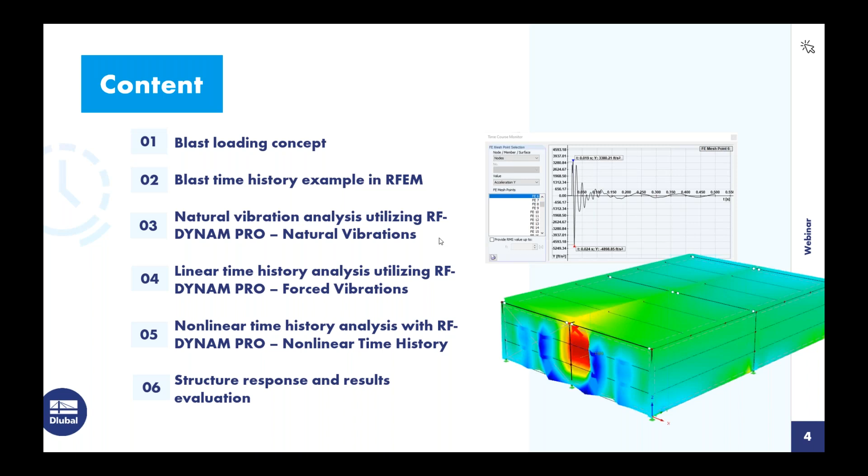We're also going to be utilizing a few different add-on modules within the program. The first is RF-DYNAM Pro Natural Vibrations, which will allow us to run a natural vibration analysis for our structure to determine the angular frequencies, the natural frequencies, and natural periods. Then we'll move on to a linear time history analysis utilizing RF-DYNAM Pro Forced Vibrations. Finally, we'll take into account any material or geometric nonlinearities with the additional add-on module extension, RF-DYNAM Pro Nonlinear Time History. Through all of this, we'll definitely be looking at the structure response as well as the results evaluation for each one of these results.

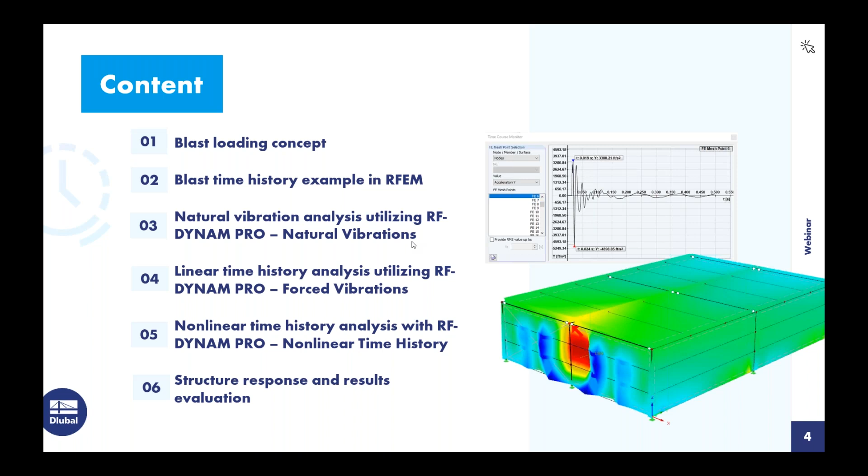Okay, so getting into the blast loading basics. As I mentioned, we're primarily going to be referring to the AISC Design Guide 26, Design of Blast Resistant Structures. We'll also be making some reference to the United Facilities Criteria 3-340-02, Structures to Resist the Effects of Accidental Explosions. Now, there are many more references out there for blast time history, but for today's example, I wanted to specifically refer to Design Guide 26 because this simplifies the time history analysis quite a bit and was just the best guide for today's example within the program.

Now, what are the factors influencing structural damage when we talk about these types of explosions? Well, we know that the structure material is definitely going to play a role, as well as the overall mass and stiffness. What else is important to know is the explosion type, as well as the distance to the structure. Clearly, a larger explosion that is closer proximity to our target structure is going to cause a lot more structural damage than what we'd see from a smaller explosion located further away. And finally, the blast orientation to the structure. Is this located at ground level? Is it up in the air? What proximity to the structure? And of course, if we are located in an urban environment, do we have surrounding structures that we need to consider as well?

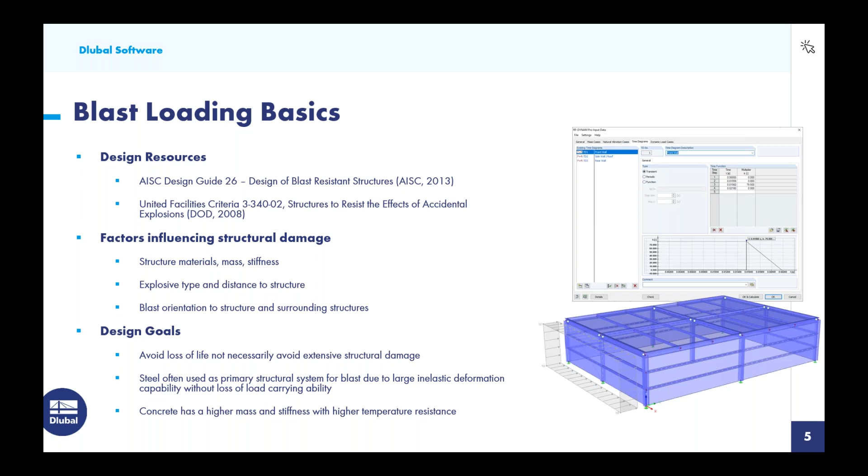Now, as far as the blast load application in terms of a time history, on the right-hand side we have what's called an idealized pressure time history for blast loads. There are certainly several theoretical approaches for exactly plotting this particular curve.

Let's first begin with the peak overpressure - the pressure above the ambient atmospheric pressure, hence the name overpressure. This will be an instantaneous pressure that arrives at the structure. In this diagram we have a short period where nothing happens until the time of arrival, then that instantaneous rise for the peak overpressure applied to the structure.

The positive phase duration is the time period that it takes for the pressure to return back to ambient, or back to zero, shown in the positive portion of the diagram. We also have what's called the positive impulse, which is the total pressure time energy applied during the positive duration - this is the area under the curve.

And finally, we have the negative phase duration. This includes the energy, again the impulse, which is the area underneath the curve that follows the positive phase, where the pressure falls below the atmospheric pressure.

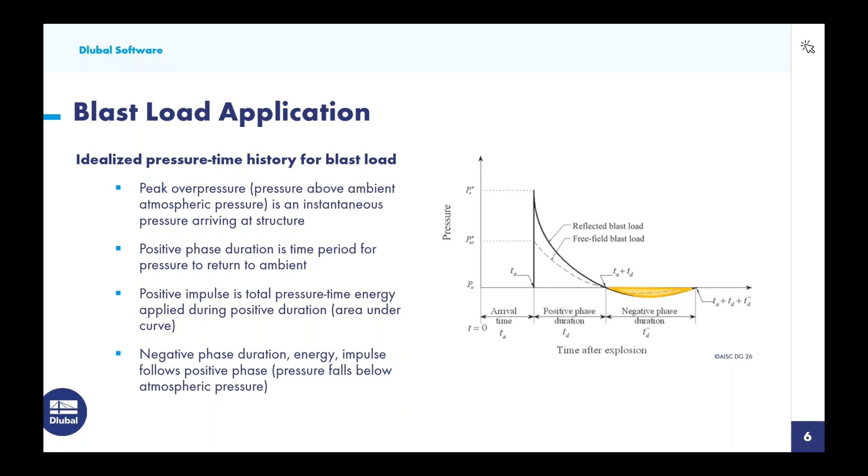Turning to the two different lines you're noticing on this diagram, we have the reflected blast load shown in a solid line, and the free field blast load shown with a dotted line. So what exactly are the differences here?

We'll start with the free field blast load indicated by this dotted line. You notice the magnitude is much lower here. This is what we call the free field or side-on blast load, where the blast wave travels parallel to a surface, more or less just sweeping over this surface with no impeding objects. We might see this with sidewalls, roof elements, or our rear wall, which is what we'll be noticing with today's example. In most literature, we'll see the subscript SO used for side-on.

Now, we also have the reflected blast load, and this is where the blast wave will strike at an angled surface other than parallel. A perfect example would be any surface that is normal to the explosion, so some type of front-facing facade. Obviously, we're going to have much higher pressures here than what we'd see with a wave sweeping over those other surfaces that are parallel to it.

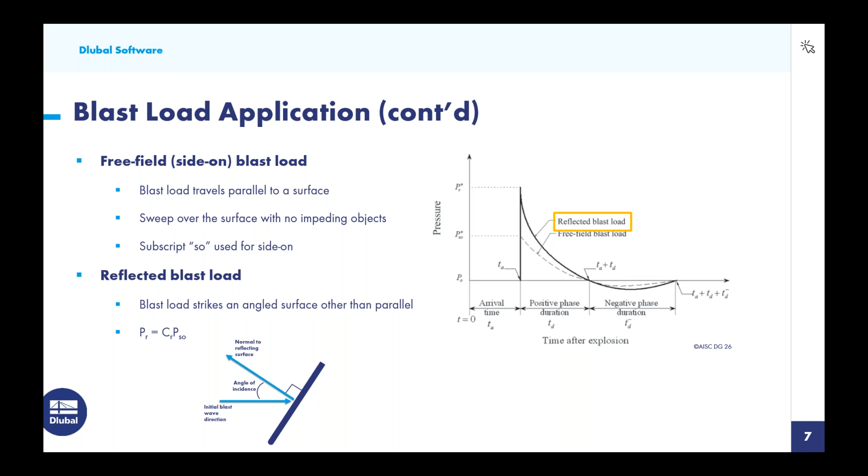So we calculate this reflected pressure with what's called the reflected pressure coefficient multiplied by the side-on pressure, given by this equation. Referring now to the UFC document, there is a nice figure here, 2-193, and you'll notice that the angle of incidence is given on our x-axis.

Then we would locate our peak incident overpressure. We can follow this along to determine what our reflected pressure coefficient should be.

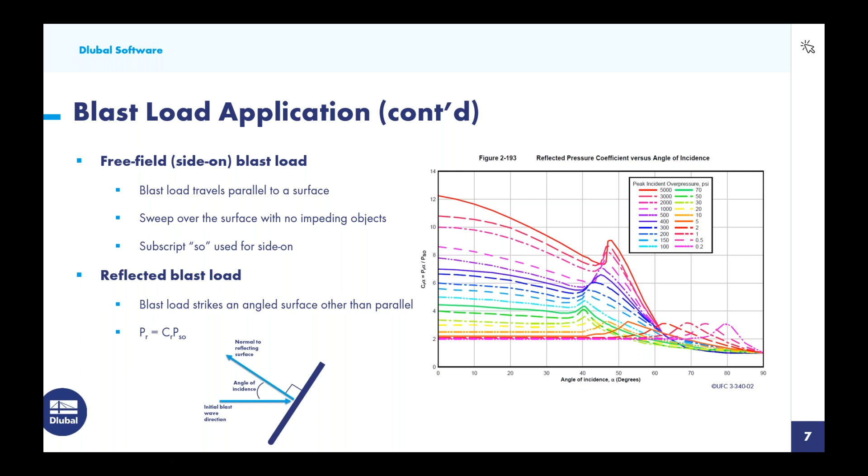So what exactly is the angle of incidence? If we look at this small diagram on the lower left, we have our initial blast wave direction. It is going to reflect off of this surface normal, so a 90-degree angle here, which will produce an angle of incidence. This is the value we want to locate within this figure to determine what that coefficient will be in order to increase those reflected pressure loads.

So moving on to the blast load simplification - we're primarily referring here to AISC Design Guide 26. Let's first start with the pressure time history positive phase.

What we're going to do here is simplify it to a triangular distribution, but we still want to maintain that instantaneous rise as well as a linear decay. So quite a simple application when we compare it to the more theoretical approach shown in the background.

Now, it's important that the peak pressure as well as the impulse are preserved - remember, the impulse is the area underneath the curve. So we have to come up with some other fictitious duration in order to maintain both P and I. This is estimated to be approximately 2 times I over P.

When we're talking about the negative phase, we're actually going to neglect this for the demonstration today, just for simplicity. As engineers, we don't necessarily always want to neglect this - it could be important when we have elements on our structure that are weaker in the reverse loading direction, or we should also consider it for short natural periods compared to the load duration.

Now, some other considerations that we will not be taking into account today include the drag forces due to wind or dynamic pressures - do we have a large wind load following up along with this blast wave as well? Both Design Guide 26 and the UFC document, and many others, give consideration to these drag forces. Do we have large openings to account for the interior loads due to leakage?

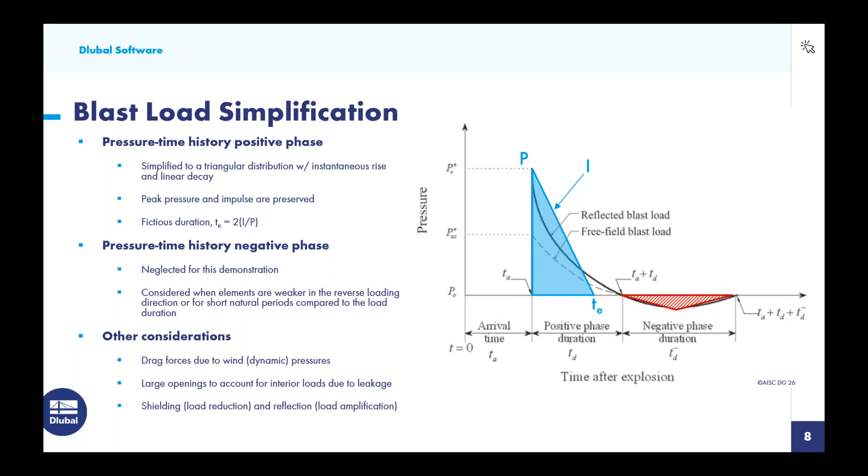On the positive side, we have what we can consider shielding, which is load reduction. When we have a blast wave and we have many other objects in front of our target structure, then of course the load will be reduced. But on the downside, we have what's called reflection, where the load can actually be amplified because it's reflecting off of all of these different objects directly onto our target structure.

So let's take a turn now from these basics and take a look at RFEM, which is our finite element analysis software. This is the main program where we'll fully model the structure. We can load it with general static loads and run a full analysis.

But when we're talking about dynamics or any type of time history, we do need to utilize our dynamic add-on modules. And we actually have a total of 4 of them.

The first is RF-DYNAM Pro natural vibration. This is a prerequisite - we have to go ahead and run the natural vibration analysis before we consider any of the rest of these dynamic analyses listed here. This is going to run the eigenvalue analysis, determine the mode shapes. We can take a look at angular frequencies, natural periods, and we'll definitely be doing that today.

The second add-on module, RF-DYNAM Pro equivalent loads. We actually will not be getting into this add-on module today. It is much more focused on seismic, and in particular a response spectrum analysis according to ASCE 7, the NBC, and various international codes as well. I've done previous webinars on this topic, so refer to our website and YouTube channel if you want to learn more, but we won't be getting into that today.

RF-DYNAM Pro Forced Vibrations does allow us to run a limited response spectra analysis. We can also take into consideration accelerograms, but what we'll be utilizing it for today is to run a linear time history analysis for these blast loads.

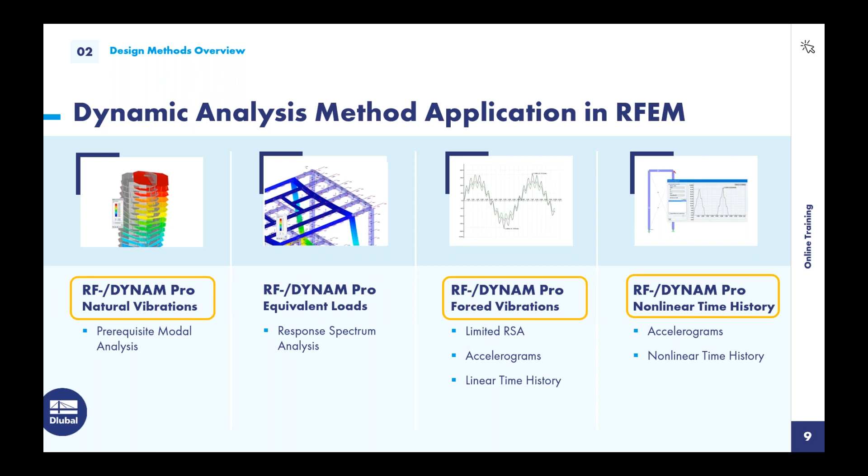So now moving on to our example. Again, I'll be referring to AISC Design Guide 26, and in particular example 2.1. The example within RFEM will follow very closely with this today.

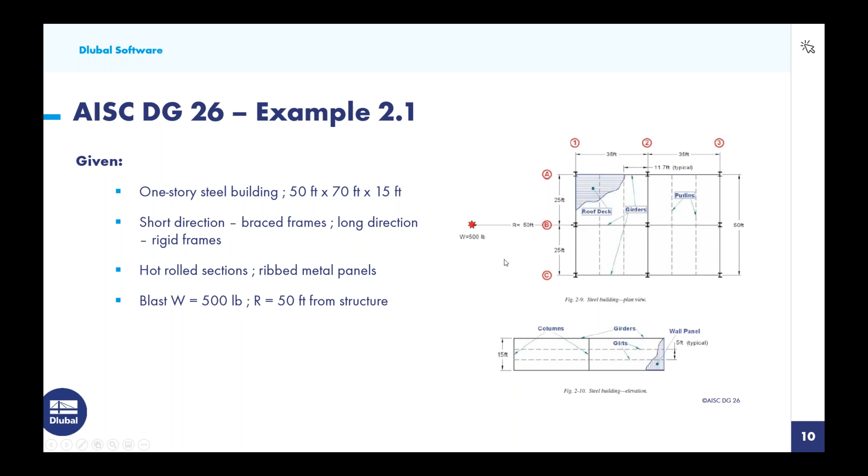So in order to consider the time diagrams for our time history analysis, we actually need to now move through the solution to determine what all of these different variables are. So we begin with the scale distance, and this is indicated by the variable z. Z is given to us by r over the cubed root of w, which is simply 50 feet away from the structure with a charge weight of 500 pounds. Then we're going to get 6.3.

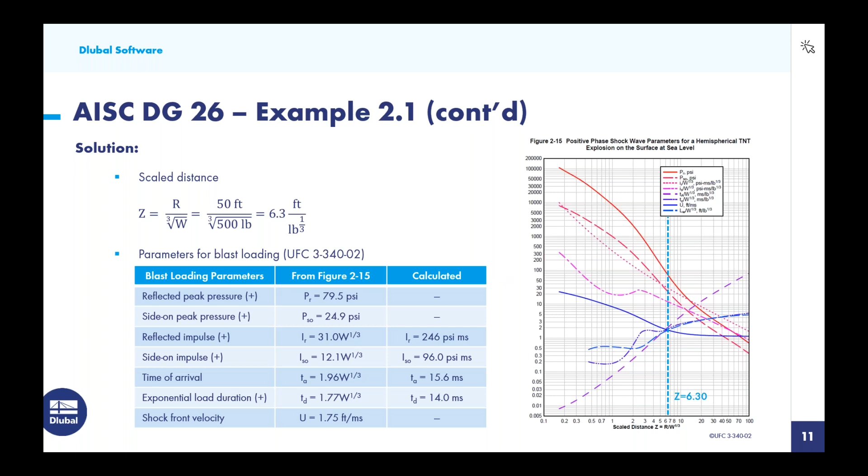Moving on to the sidewalls and the roof, what we'll be applying here is the side-on pressure - remember, that smaller triangle within our idealized curve. For simplicity as well as the conservative approach, we're actually going to use the same scale distance Z that we use for the front wall centerline, also for the sidewalls and roof. Realistically, we could calculate a larger Z to decrease our magnitudes, but again, for simplicity and the conservative approach, we'll just use those same values. Therefore, we need to calculate T sub E. We have P sub O and I sub O from the previous slide, so 2I over P equals 7.71 milliseconds. This is all that's needed for our time diagram for the sidewalls and the roof.

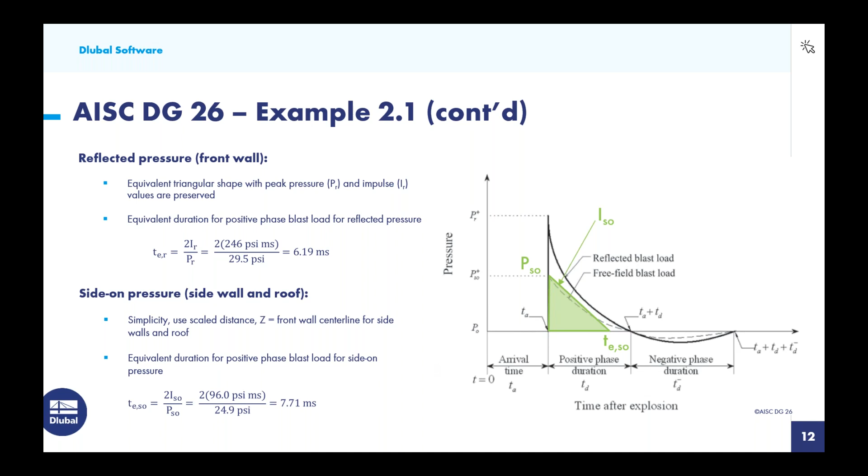Now, the final step here is the rear wall, which is a little bit different than what we just saw with the previous two structure portions. The advantage here is that our charge distance is increased. We have our blast taking place at about 50 feet away from the structure face. We can also consider the full length of the structure here, 70 feet, so our new charge distance is now 120 feet. We calculate that with the scale distance using that new R value, and we get 15.1. So at the front of the structure, we have Z equal to 6.3. At the rear, we have Z equal to 15.1.

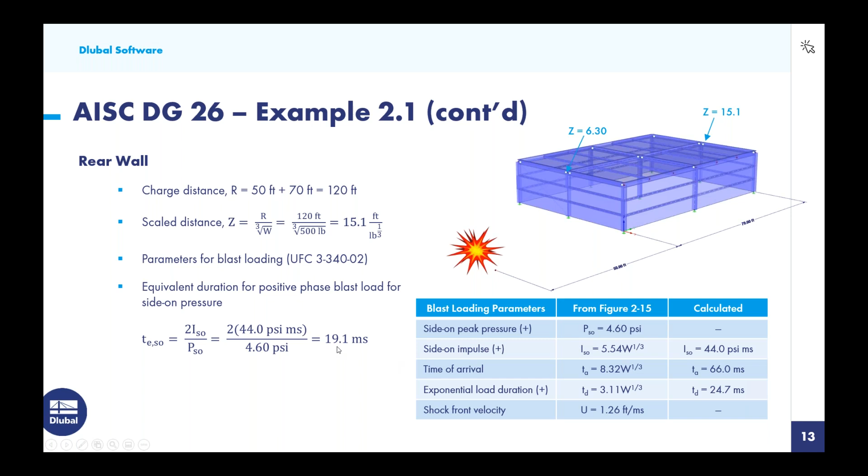So once again, we refer back to the UFC document to figure 2-15. We take a look at Z equal to 15.1, and here is a summary of all our parameters. You'll notice I only listed the side-on peak pressure and the side-on impulse rather than reflected. This blast load is going to sweep over the rear wall - we don't have any type of reflected load occurring here, so that higher magnitude is not of interest to us. Now we do need to calculate that equivalent duration for the positive phase blast load, and again we run this calculation with 2I over P using this data with our new Z value, and we get 19.1 milliseconds.

Now it's also slightly different here in that for our rear wall, it's going to take the blast wave a little bit of time to ramp up to that full peak pressure. It's not instantaneous like what we're seeing with the front, side, and roof. So how do we calculate this? Well, we know the estimated time of arrival is 66 milliseconds.

We calculated that from figure 2-15. What we now need to calculate is this time to the peak pressure, T2.

That's really easy to calculate because how we'll do this is to take into consideration T sub A, which is the time of arrival, and we're going to add on L1 over U, where L1 is the span of the element parallel to the traveling wave. In our case today, it's how long it's going to take for this charge to reach the top of the wall, and that's 15 feet in height. U is going to be the shock front velocity given to us back a couple slides ago from the UFC figure 2-15. So we have this length, we divide it by velocity, we get a time, and ultimately we get 77.9 for T sub 2.

Now the time to the end of the blast is just going to be T sub 2. We're going to add on that estimated time that we calculated on the last slide of 19.1 milliseconds, and we get 97 milliseconds.

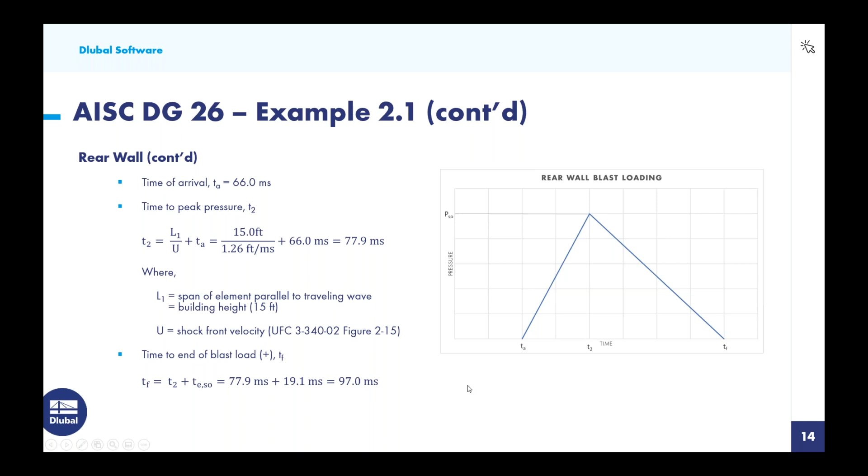A few assumptions that I just wanted to reiterate: of course, we're using this equivalent triangular loading function over the more exact loading function. There are plenty of more theoretical equations, such as the Friedlander approach, if you wanted to calculate that curve exactly. We are going to neglect the negative phase of the shock, as well as some of these other variables I mentioned, dynamic pressure, openings, and so on.

Finally, for simplicity, the full side-on pressures are computed for the non-reflected surfaces. So this includes the sidewalls, the roof, and the rear wall. This is the full value here. Rather, in the UFC document, there are load averaging techniques to decrease this magnitude. So a lot of the approaches that we took today are definitely the more simplistic but also the more conservative approach. UFC will have much more information if you want to get into more detailed analysis.

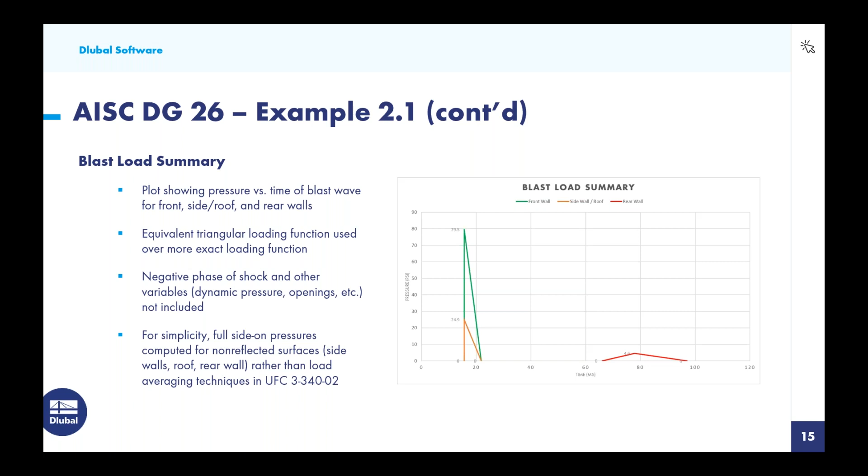All right, so now we are ready to get into RFEM. You'll see the structure already modeled here. This is exactly from the PowerPoint as well as Design Guide 26 that I mentioned. It is just a basic one-story steel structure, 50 feet in width, 70 feet in length, and 15 feet in height. We're going to assume that the explosion happens over here on the left-hand side, normal to this front face that we're seeing here.

To quickly just cover a few of the cross sections that I've used in this example: for my columns, you'll see I have W14 by 193. When we look up at the roof, we'll see W18 by 130, used for those main beams and main girders. We also have our purlins, which are channel sections, channel 10 by 25. And then we also have our girts, which are again channels, C10 by 30 sections.

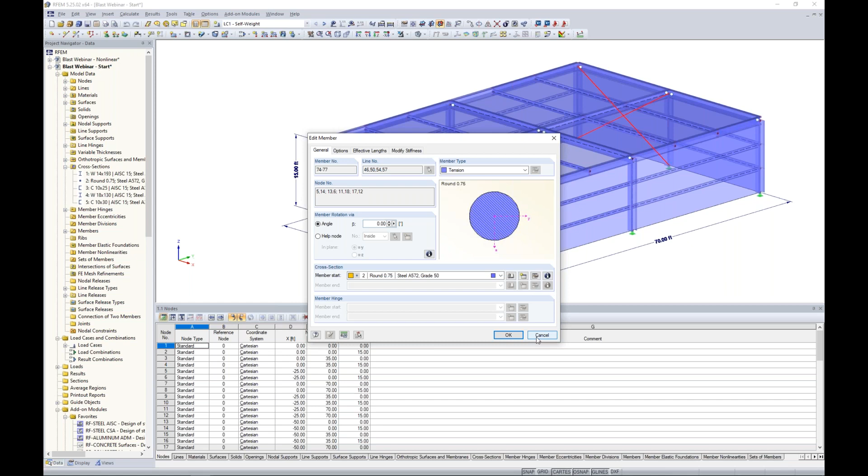It's also important to know, if I highlight these elements here, we have a couple of X braces. Remember, in the problem statement, we have brace frames in the short direction and moment frames in the long direction. I added this lateral bracing here, and if I double click on it, you'll see that these are tension only members. So in the program, these will take only tension forces, some type of cable element we'll assume. When the program experiences compression within these elements, it will completely take it out of the analysis, but RFEM being a nonlinear analysis, it can reactivate these if we see tension again in a subsequent iteration. So let's just keep that in mind for those X braces.

Now, looking at the surfaces, for both the roof and the walls, what I went ahead and modeled here are orthotropic stiffness surfaces.

And it's just a general steel A653 grade 40 material.

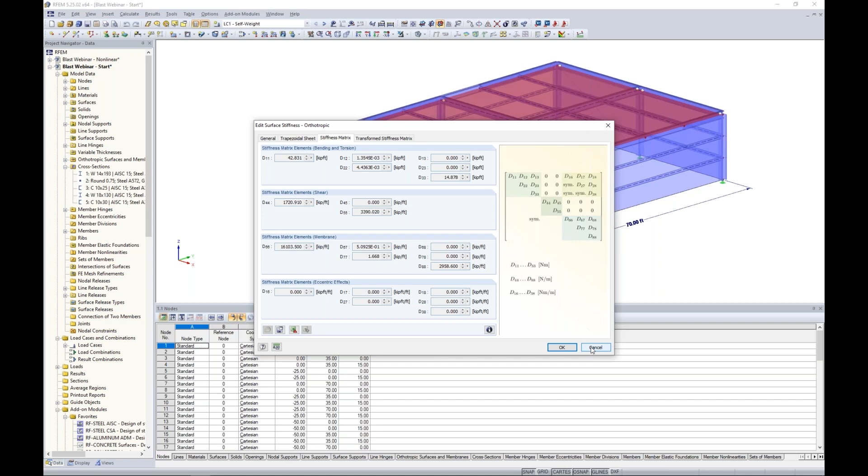When we go into the detail settings of this orthotropic stiffness, we'll see that I have set this to a trapezoidal sheet. What's convenient with this option is under the second tab, I can simply put in the sheet thickness and some of the geometric variables for my ribs, including spacing and so on. The program will automatically calculate my stiffness matrix for me. This is definitely going to add a lot of lateral stability to our structure at that roof level, and I went ahead and used it for the wall elements as well.

All right, so that is a basic overview of our surface elements as well as our members. Under my display, what I'll do is turn off my dimensions here. And let us discuss the loading.

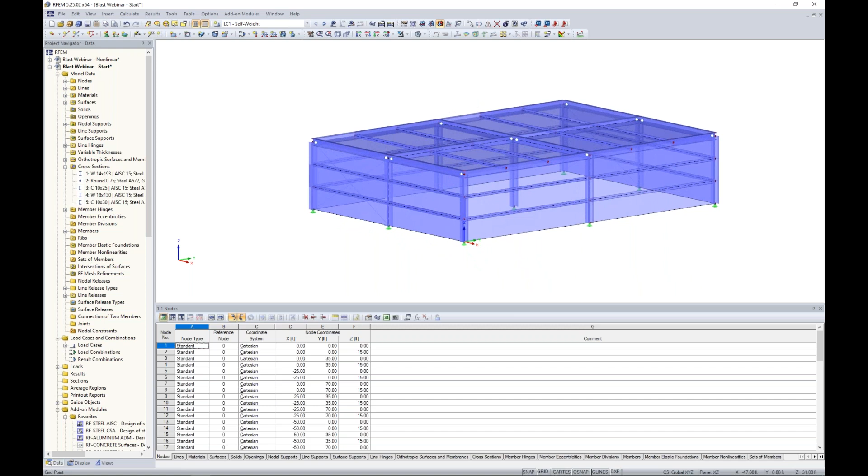So I've created 4 separate load cases here. The first is going to be self-weight, and it will account for the self-weight internally of all our members and surfaces automatically, but I've also added in a general member load up at the roof level to those main beams and girders, 0.1 kips per foot, to account for any additional dead load we may have up there.

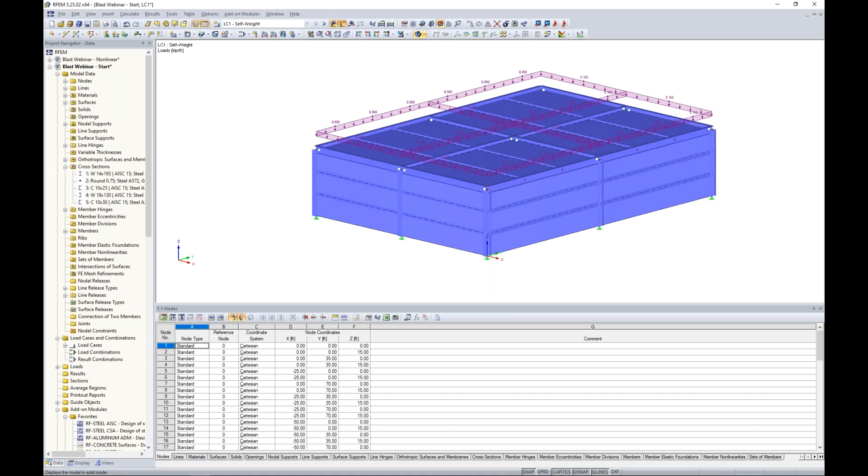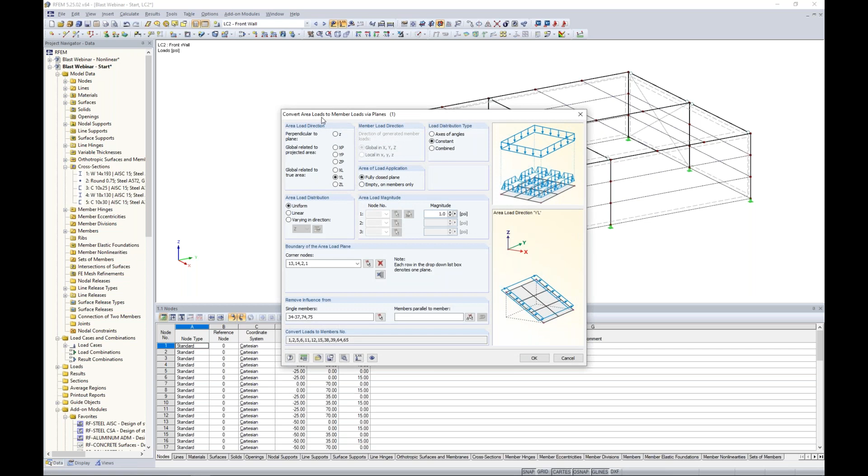Now, the next load is going to be for my front wall, and we can see this load applied as an area load. This is to initially account for that blast load acting on this front surface. This area load is a bit special because it's going to convert the area load to member load. I'm not applying it to this surface, but rather I want it applied directly to these main lateral resisting frames, and you can see the magnitude is set at 1 psi.

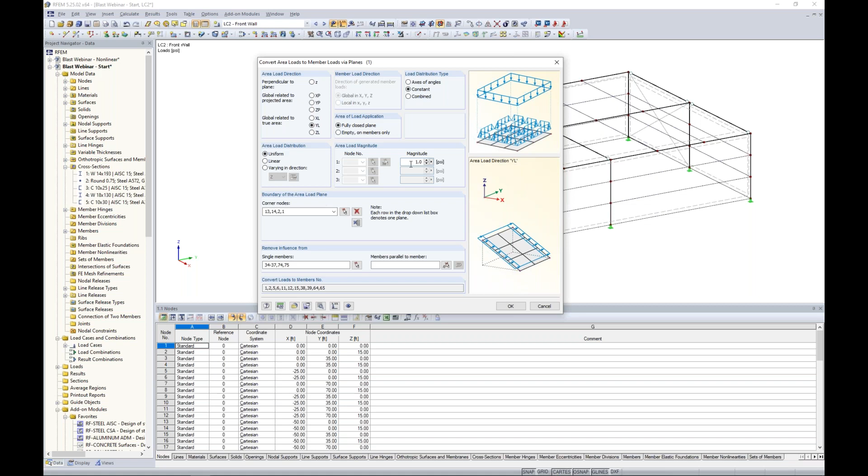We want to use a very arbitrary value of 1.0 here. Later on in the time diagram, I'm going to tell the program how this magnitude will increase or decrease and vary over time with the actual time history analysis, but for now we want to set this to 1.0. So with this front area load, if I right click and display separately, we can see those as member loads based on their tributary width applied directly to those frame elements.

In a similar fashion, if we take a look at load case 3, we have area loads on the sidewalls as well as area loads on the roof, and once again all of the magnitudes are 1 psi. If I right click and display separately, you'll notice I applied them to those main frame elements. I did not apply them to any of the channel sections for the girts or purlins, and again I did not apply directly to the surface. I'm more interested in the structural response of these main elements included in our frames.

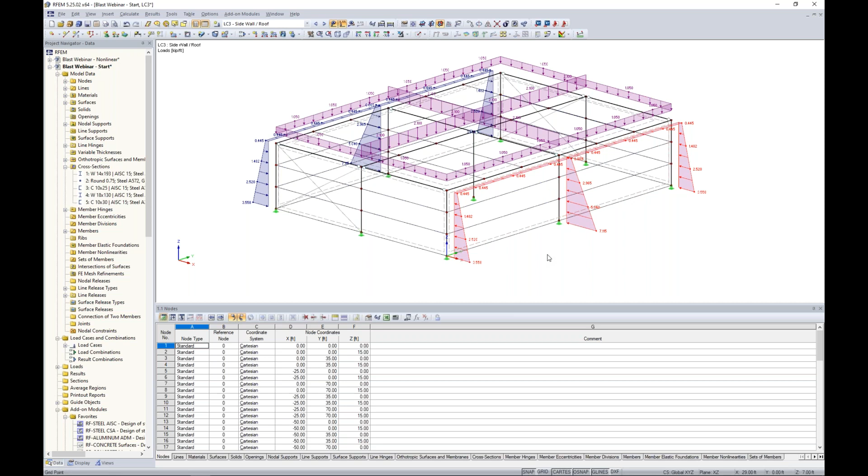And finally, we'll take a look at our last load case here, and we have an area load applied to the rear of the structure, normal to that rear facing wall, 1 psi. I can right click to display separately, and we see those member area loads applied directly to those elements as well. So a very basic application here.

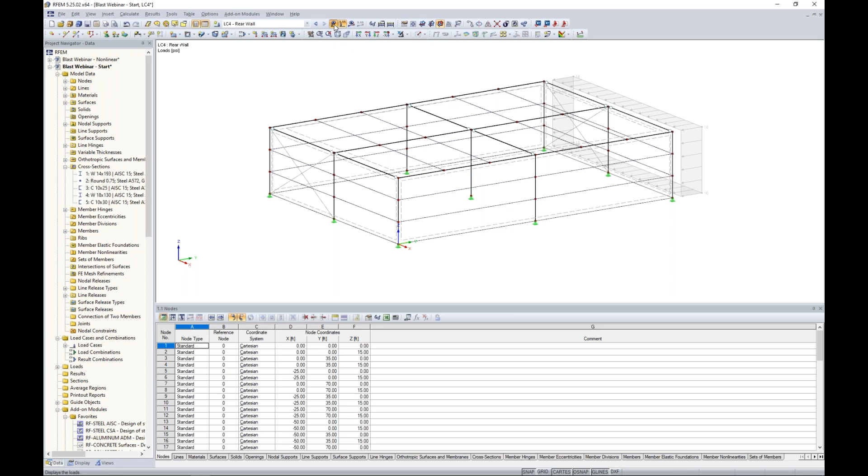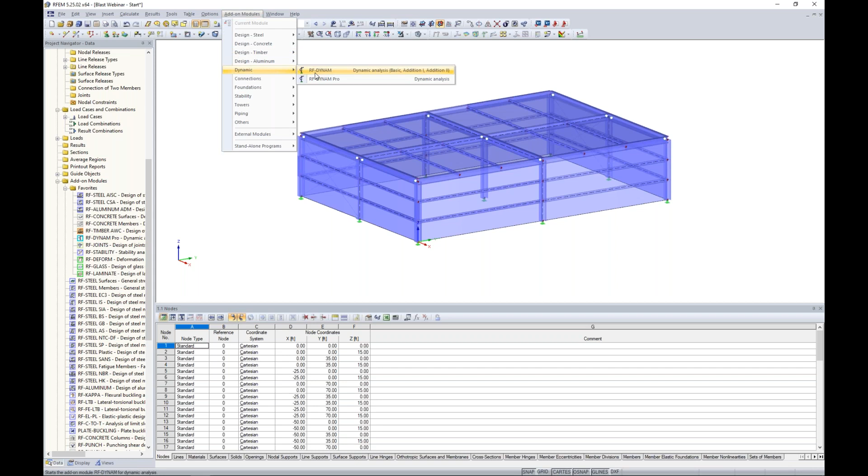Now, we're not going to spend any more time within RFEM, but rather we want to move into the dynamic analysis. So what I'm going to do is launch RF-DYNAM Pro, and we can see in our project navigator here is our long list of add-on modules. You can find RF-DYNAM Pro here, or we can go up to the add-on modules and find it categorized a bit better under dynamic, and we launch RF-DYNAM Pro.

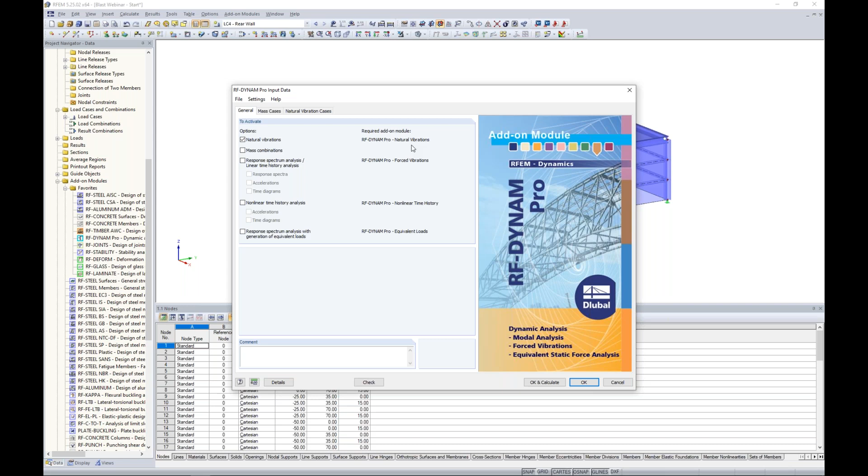This add-on module is going to be nothing more than a simple dialog box that pops up, and here are those 4 different dynamic modules that we discussed in the PowerPoint. You'll notice by default the first one activated is RF-DYNAM Pro natural vibration. So again, this is a prerequisite. We have to run this natural vibration analysis before we move on to any of the additional add-on modules.

I also can activate here my mass combinations tab, and we'll get an additional option. This is if we wanted to combine multiple mass cases into a combination. I won't be doing that for today's example, but that is an option. So really we just need to move from left to right here with our tabs. The first mass case, I'm actually going to import, if you remember, that first load case, which includes self-weight as well as that member load applied to the roof structure for those various elements.

Now I'm going to uncheck here from self-weight of structure. If I leave this checked, we're accounting for self-weight twice, which would be incorrect.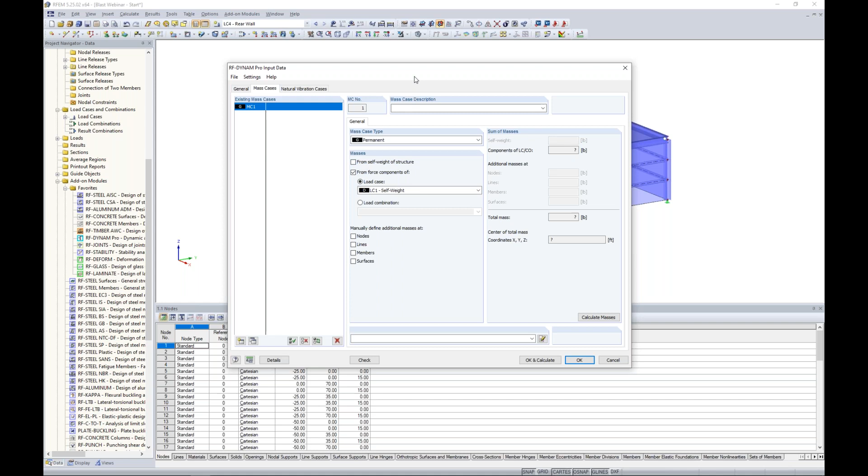We also have the ability to define additional masses at nodes, lines, members, and surfaces. We can deactivate masses, so a lot of possibilities here. But for now, we'll just stick with this single mass case and move on to our natural vibration cases.

We want to initially tell the program how many eigenvalues to calculate. For my structure today, I'll set this to 30. The scaling of the mode shapes, we'll leave this as the square root sum of the squares, and we can move on to the calculation parameters.

Under this dropdown, we want to select either our mass case or our mass combination of our acting masses that we want to consider for the natural vibration analysis. In our case today, we only have one mass case, so that's what's available.

As far as the directions or about which axes this mass is acting, this is somewhat dependent on the type of mass matrix. With the diagonal matrix translational degrees of freedom, some of the options above are grayed out, but as we scroll through, translational and torsional degrees of freedom, rotational, we have different options available. So we'll be moving forward with the diagonal matrix translational degrees of freedom for today, as well as the general Lanczos solver.

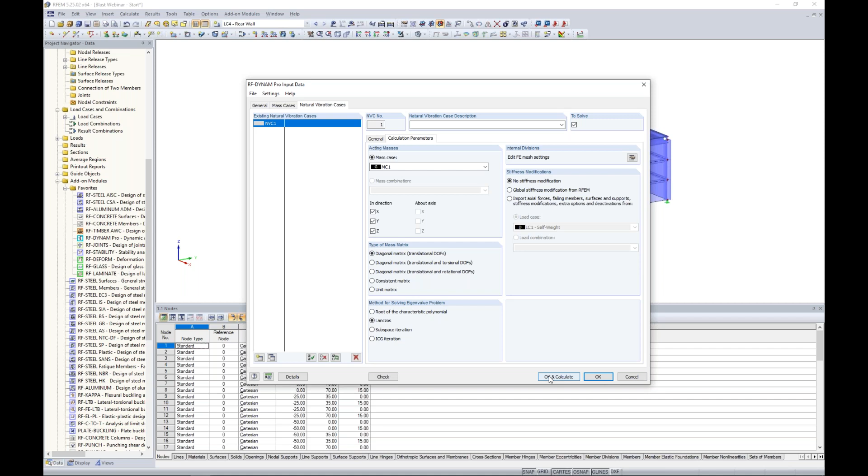Our help file, which you can locate down here at the lower left-hand corner, will give much more theoretical background on some of these different options and how it can improve the calculation for your particular structure. So once we are done setting all of our natural vibration case data, we can go ahead and run the calculation, and you'll see for today's example, this solves rather quickly.

So we are presented with our results of the dynamic analysis back in RFEM. Now we're technically still within this add-on module, we can see this from the drop-down box here. We also want to view this information in table 5 for dynamic analysis.

Let me go ahead and redock my tables here. What you'll notice within this table is the natural vibration case is given to us within this dropdown. That's all that we've solved for. But right next to us are all of the 30 mode shapes that we told the program to solve for.

We can scroll through these different mode shapes just to kind of see how the structure is responding under the given frequencies. Now, I always recommend to immediately jump to this effective modal mass factors tab. And what this tells me, if I scroll all the way to the bottom, is the mass participation.

This is shown at 95% in the X direction for a sum of all 30 of our eigenvalues, and 96% for a sum of all of the eigenvalues in the Y direction. So this is great mass participation. We like to see something around 90% or more.

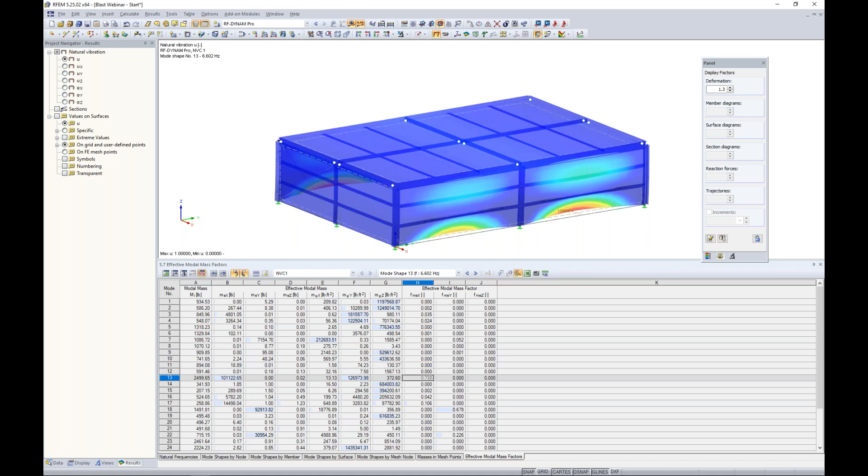What else I want to pay careful attention to is what we call the dominant modes. If I look at a lot of these early modes, there really isn't much mass participation going on until we get down to mode shape 13. And we have 74% participation in the X direction.

Then I go a little bit further and I see my dominant mode in the Y direction. So this is 68% in the Y direction.

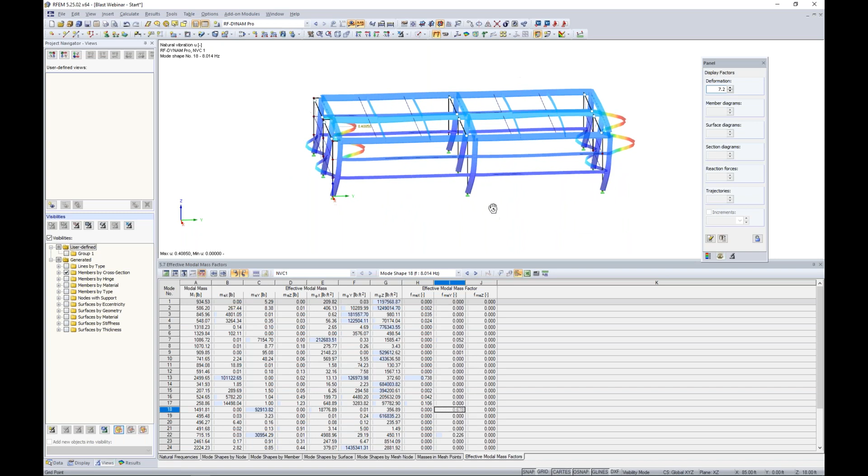What might also be helpful too is under our views tab, we can deactivate our surfaces here. Maybe we increase our deformation, so we can see we're really getting a response of the structure as a whole. Now, of course, there are some maybe what we call more local modes with these girts, but overall, this is certainly our dominant mode in the Y direction.

So keeping in mind mode shape 13 and 18, we jump back to this first table here, natural frequencies. I'm going to highlight, let's take a look at mode shape 13 as well as mode shape 18. So for these two dominant modes, I can now determine what my angular frequency is, my natural frequency, and my natural period.

Now, we might be thinking, well, what does this really matter for a time history analysis? But this actually does come into play a little bit later on when we're talking about damping considerations. So we'll just leave this highlighted in the background for now. It's great to understand which are our dominant modes for the structure for the natural vibration analysis. So let us go back into RF-DYNAM Pro then.

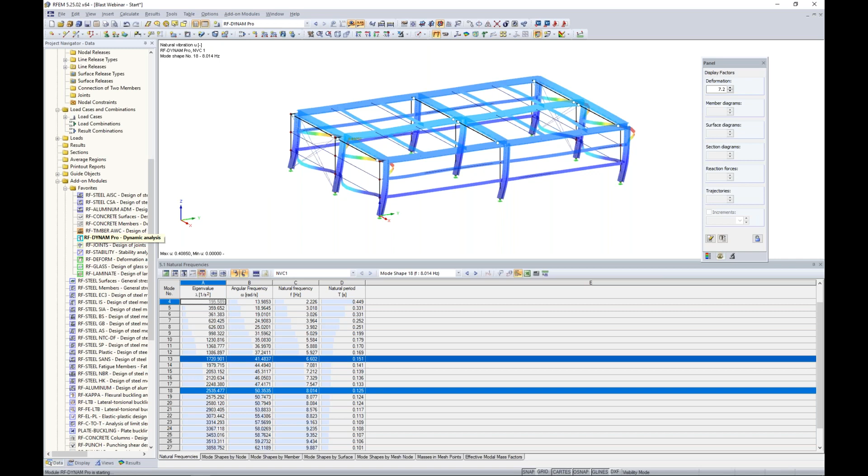And what we can do now is activate RF-DYNAM Pro for forced vibrations, time diagrams. We get two additional tabs at the top. Everything we've just input for the natural vibration case remains the same, so no changes to be made there.

But now we want to move on to our time diagrams tab. This is where we input the information we solved for within the PowerPoint, to tell the program how the loads applied back in RFEM as load cases will vary in magnitude over time due to this blast load. The first time diagram we want to specify is for our front wall.

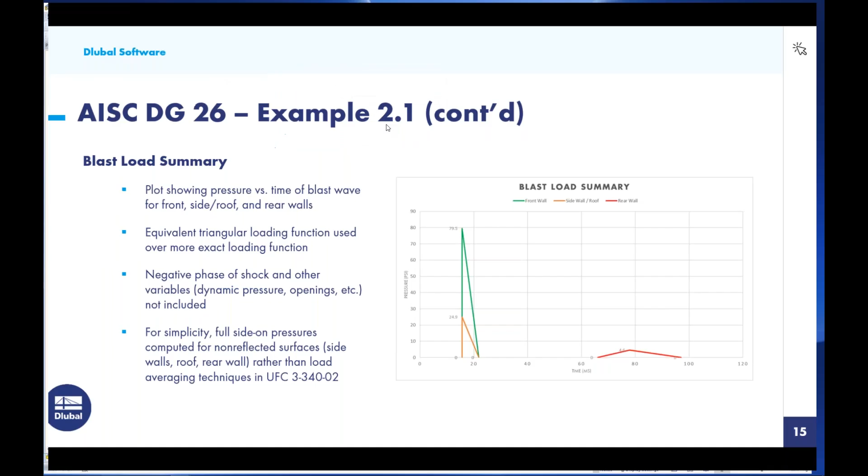I'm going to jump back to the PowerPoint for a quick refresher on what the time diagram should look like for this front wall. Using the simplified approach, we have a short time period until the time of arrival, an instantaneous pressure rise up to 79.5 psi, and then a linear decay back to 0. All of our points are given here in terms of pressure and time, and this is the information we want to input into the program.

For the first time step, we will specify the transient option. Transient just means we can input each individual time step here, and that's what we'll be utilizing today.

In turn, we can utilize a periodic option, which would be interesting for rotating machinery, for example, where we put in an angular frequency as well as a phase shift.

Finally, there is the ability to input a function, so we can define variables and parameters. This would be extremely useful if we were taking the more theoretical approach for the idealized pressure time history curve, for example the Friedlander equation. We have additional resources I can relay to you if you're interested in that more theoretical approach with this function option, so just reach out to us if interested.

But for today, taking this transient approach with the more simplified application, we want to input these time steps. The first time step will be 0, 0. The second time step will be 0.01559 and 0. Then we have 0.0156 with a pressure of 79.5 psi, and then 0.02180 and 0. This looks identical to what we just saw in the PowerPoint. Now, the program doesn't allow you to put two values for this particular 15.6 milliseconds, so I had to offset this by a very small value, but more or less this is that instantaneous rise in pressure for our front wall, and we are complete here.

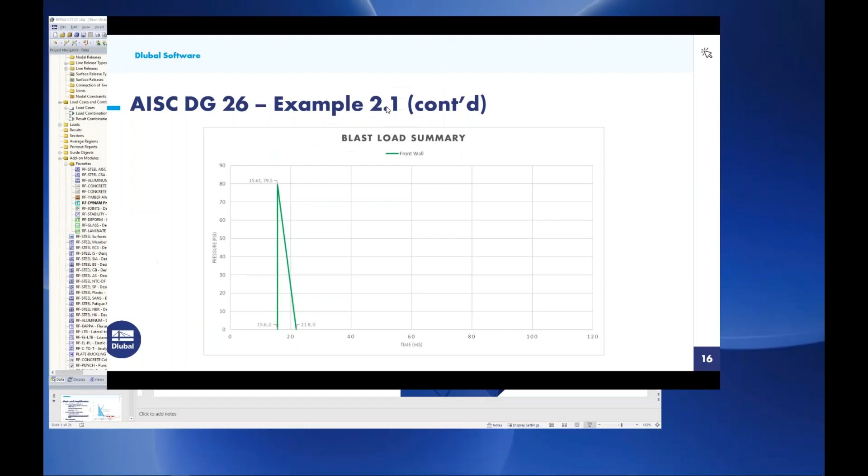Going back to the PowerPoint, let's get a quick refresher on what this should look like. Remember, the time diagram looks identical to what we saw for the front wall, with the difference that our pressure is going to be much less here, only 24.9 compared to 79.5 for the front wall, because this blast wave is just sweeping over these surfaces rather than reflecting.

So once we have these input points, we go back to RFEM. The time is going to stay the same in this first column. All we need to do is change the magnitude, or multiplier, to 24.9. And here is our second time diagram.

Now, the third time diagram will be for our rear wall. Once again, let's refer back to a nice summary. We don't necessarily have that instantaneous rise in pressure, but rather a linear rise in pressure over a certain time period, and then a linear decay back to zero for this rear wall. This is also occurring quite a bit later in time, relatively speaking, than what we're seeing with the front wall as well as the side walls and roof.

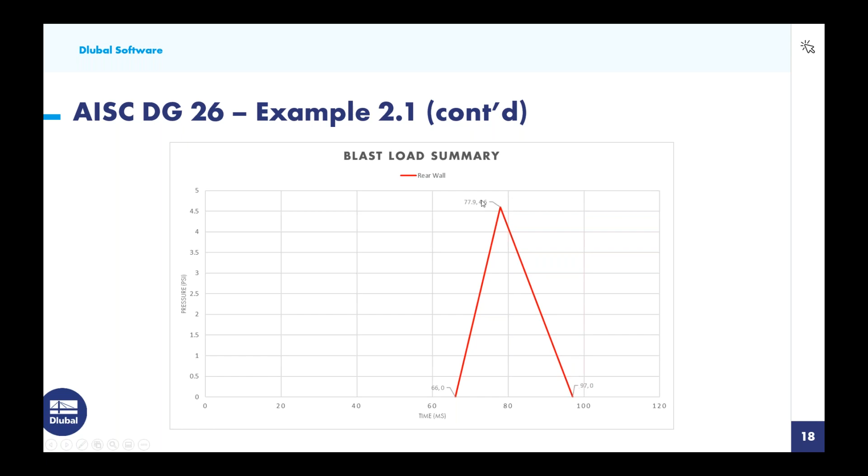So we want to take note of all these various points. Our max pressure is only 4.6 psi, so much, much lower. Going into this last time diagram, we want to input our points: 0, 0. The second point will be 0.0660 and 0. The third point will be 0.0779 and 4.6 psi, and then 0.097 and 0.

And it looks like we lost that one,

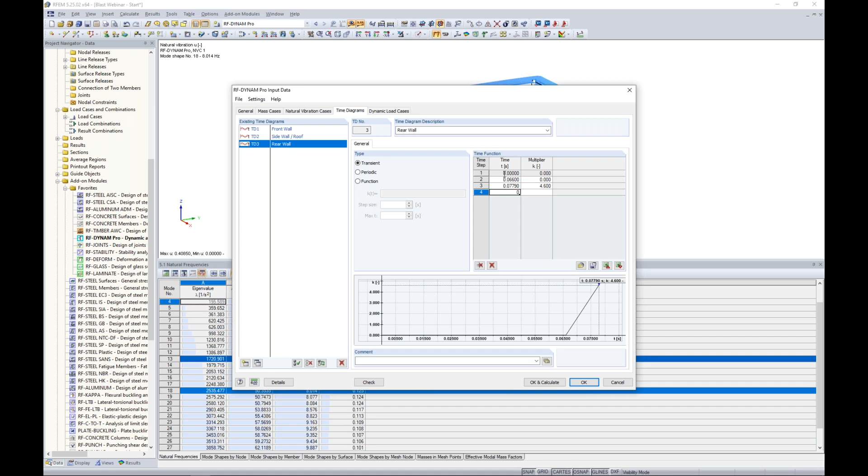0.097 and 0 - okay, so here is our time diagram for our rear wall. Notice that these are just multipliers. So when I say 4.6 psi, all that we're going to end up doing is relating it back to those load cases that we set in RFEM with 1 psi. It was important to use 1 psi because we'll use this multiplier to affect the magnitude over the time duration.

Once we have input all three of these time diagrams, we can move on to the dynamic load case tab. This first dynamic load case I will title linear, and notice only our linear solvers are available to us. The rest, grayed out, are related to other dynamic add-on modules we do not have activated. We will utilize a linear implicit Newmark analysis solver, and notice the natural vibration case is completely grayed out here, because we do not use this information for this particular solver. This is in comparison to the linear modal analysis, which heavily depends on that natural vibration case.

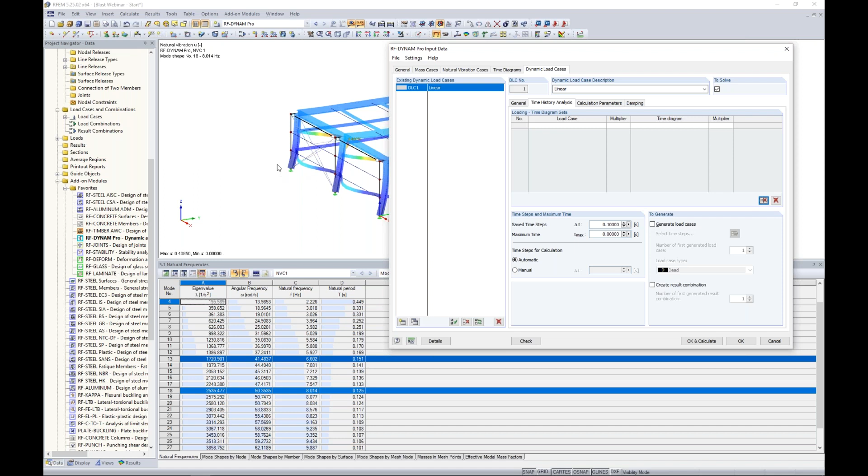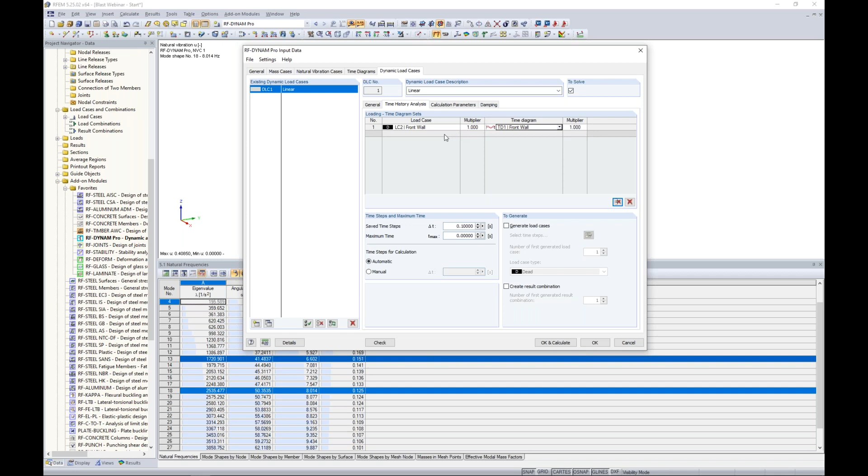With the Newmark analysis, we can move on to the time history analysis. This is where we relate those load cases back in RFEM. Remember the front wall area loads, then the side and roof area loads, and finally the rear area load. We relate each to the relevant time diagram. So the load case front wall is related to my time diagram front wall - this tells the program how to adjust the magnitude over the full duration of the blast analysis. The second set, sidewall roof, is related to our sidewall roof. And finally, our rear wall is related to our rear wall.

As far as the saved time steps, setting this to a higher value has nothing to do with the analysis itself - it's just what will be shown to us back in RFEM when we review the results. By setting this to a larger number, we reduce the file size and shorten the calculation, but if we don't have enough time steps, we won't accurately capture the results - some of those max and mins. We want nice smooth curves for something like our time course monitor, so for example today we'll set this at 0.001.

Now, the maximum time will only be 0.5 seconds. This is a very short duration, and we don't need to set this to something like 10 or 20 seconds, because everything is happening so quickly in milliseconds that 0.5 seconds will accurately capture what's going on with the structure response.

Now, the time steps for calculation - this is important for the analysis internally, and it's really a compromise between calculation time and accuracy. There is an automatic option; you can refer to our help file if you're interested in how the program sets this automatic time step, but for something like a blast analysis with such a short duration, it's a little better to have full control over what time step you're using.

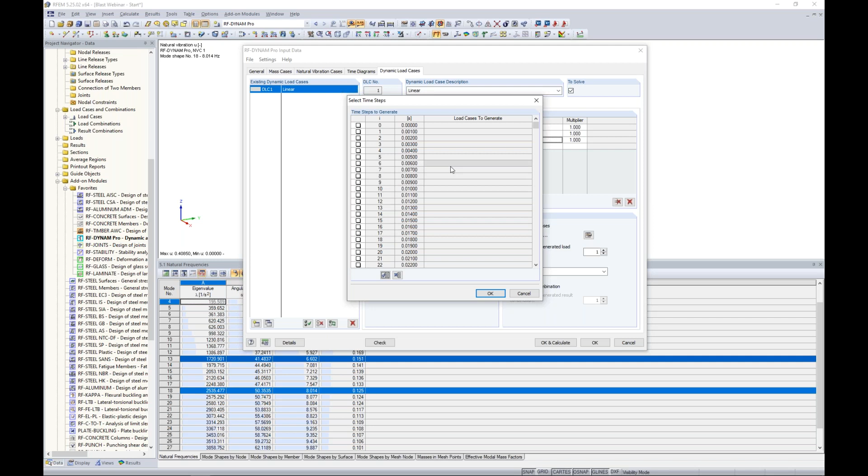We do have the ability to export out load cases here for each one of these time steps, and you can see when I go into the details, I can turn on and off the various time steps I'd like to export as load cases. But keep in mind, it's a little deceiving because we're not exporting out the loads - we are exporting out the results for the selected time steps. We won't be doing that today, but the other option is to export out a result combination.

So this is going to be an envelope solution for all the time steps that we've considered here. We can combine those result combinations with additional static loads if we'd like.

The calculation parameters: remember, the program knows nothing about the natural vibration case based on the Newmark implicit solver, so we need to redefine the acting masses here. We leave this as we've already set before, mass case 1, diagonal matrix for translational degrees of freedom.

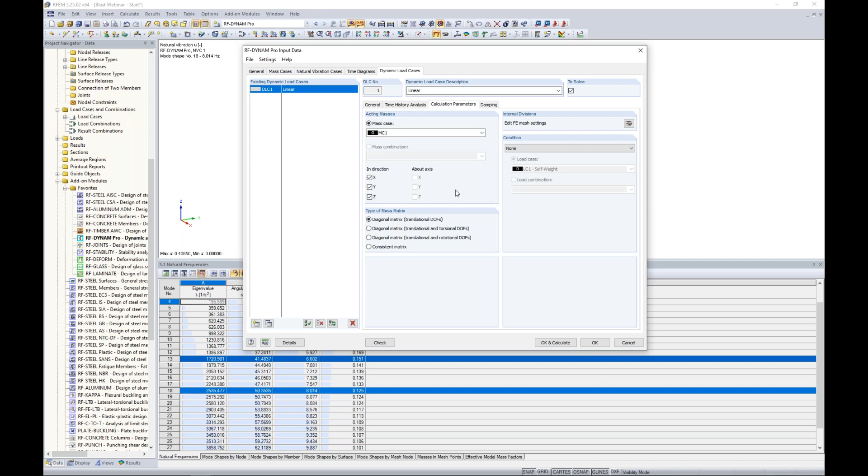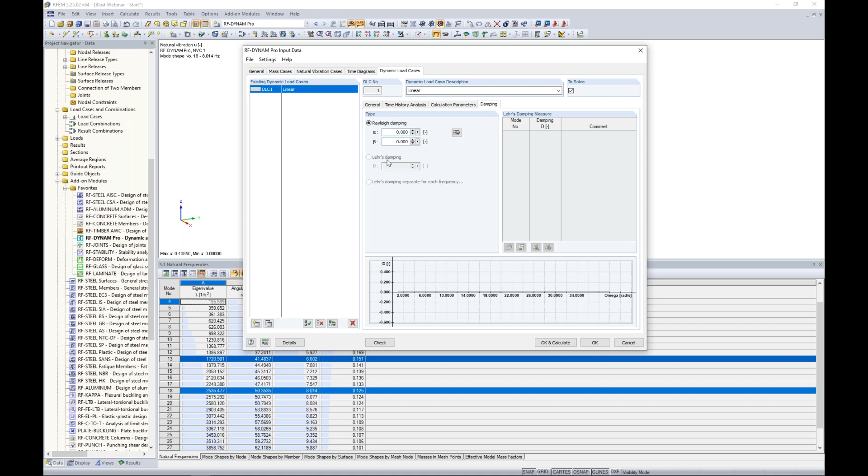Finally, we have our damping consideration. When we're talking about the Newmark solver, we have to think about damping in terms of Rayleigh, and most of us are likely more familiar with Lehr's damping. For a steel structure, Lehr's damping might be around 2%. We just need to do a simple conversion here, and it's actually an equation with two equations, two unknowns.

We can easily calculate both this alpha and beta based on the Lehr's damping that we want. Alpha is going to relate to the mass portion of the damping matrix, while beta is going to relate to the stiffness portion of the damping matrix.

So we can either do that manual calculation ourselves, or we have a nice tool in here. This tool allows me to input a couple of different mode shapes for the angular frequency, as well as my desired Lehr's damping. So this is why I have saved in the background here mode shape 13 and mode shape 18.

Remember, those were my dominant modes for that natural vibration case. So I can input my angular frequency for mode shape 13, which will be 41.48, and the damping consideration will be 0.02 for Lehr's, so 2%.

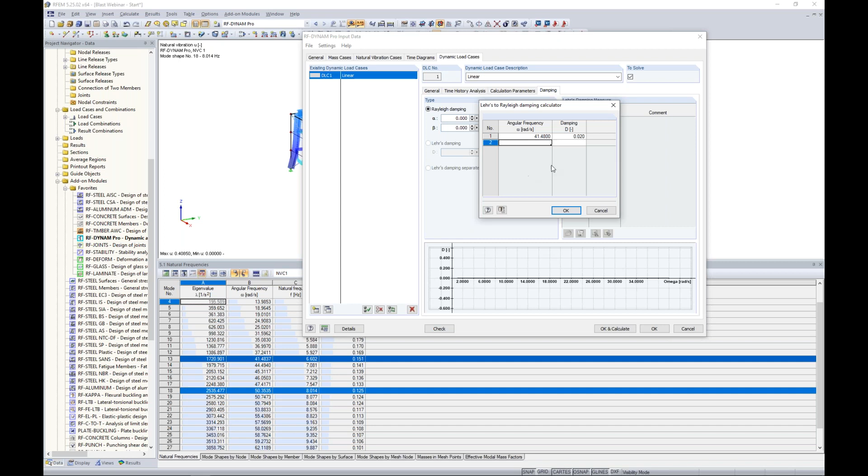Same process for mode shape 18. This time our angular frequency was calculated at 50.35, just given to us here in the background. I want Lehr's damping to be 2%. I click OK, and the program automatically calculates alpha and beta for me.

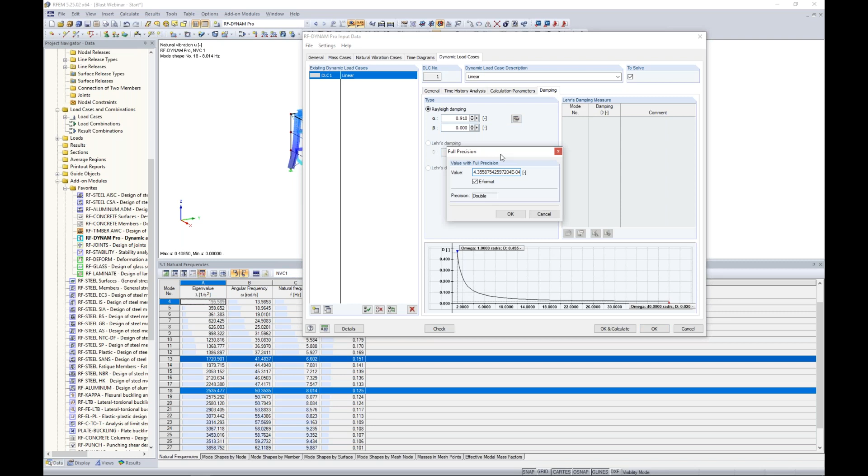Beta may look like its value is 0 here, but we can go into the full precision and see that it's just a very small number, 4.36 times 10 to the negative 4.

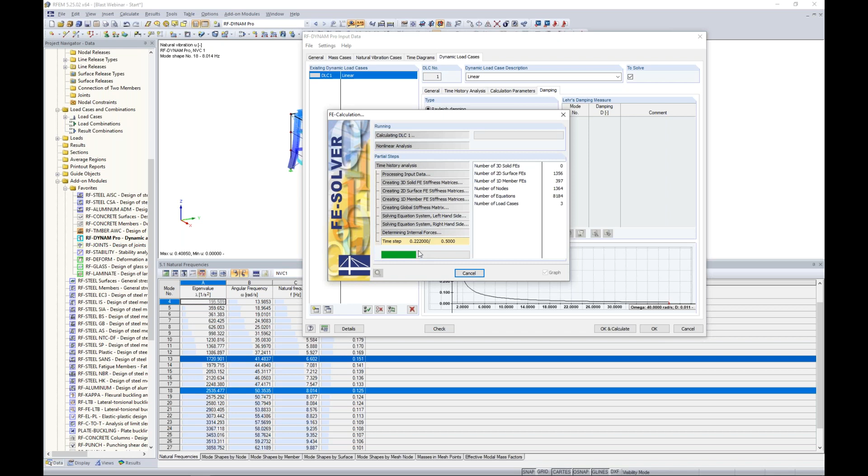Once we have input all of our information for this initial linear time history analysis, we can run our calculation. For a linear calculation, you can see it actually solves pretty quick. We have our progress bar shown here at the bottom, and we set our time step at every 0.001 seconds. Our total duration is only 0.5 seconds.

Once this is done solving, we'll be given back into RFEM here, and I'll go ahead and cancel out this visibility. We're technically still within this add-on module, RF-DYNAM Pro. We go to table 5 here. Under my drop-down, I have my natural vibration case, but now we have our dynamic load case as well.

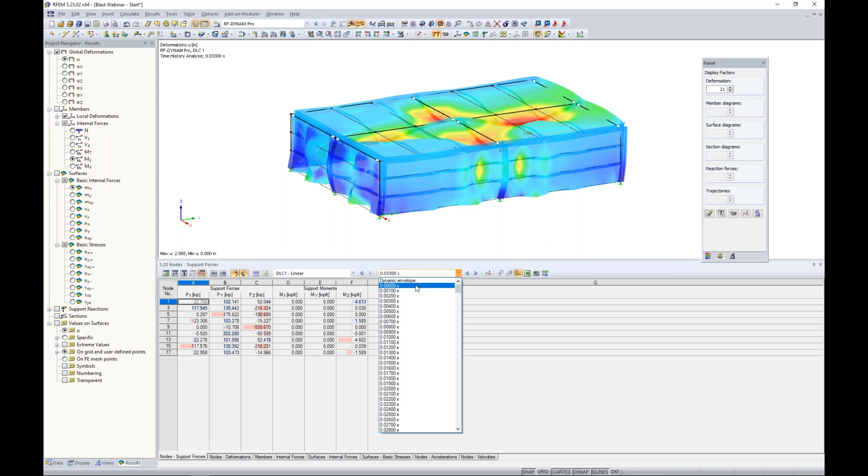Right next to that is going to be all of our saved time steps. So if we're looking currently at the global deformation here, we have time step 0. We can actually scroll through these, and remember, nothing's happening on our structure here until we have that estimated time of arrival at about 0.016 seconds, and that's where we start to see this blast load impact our structure.

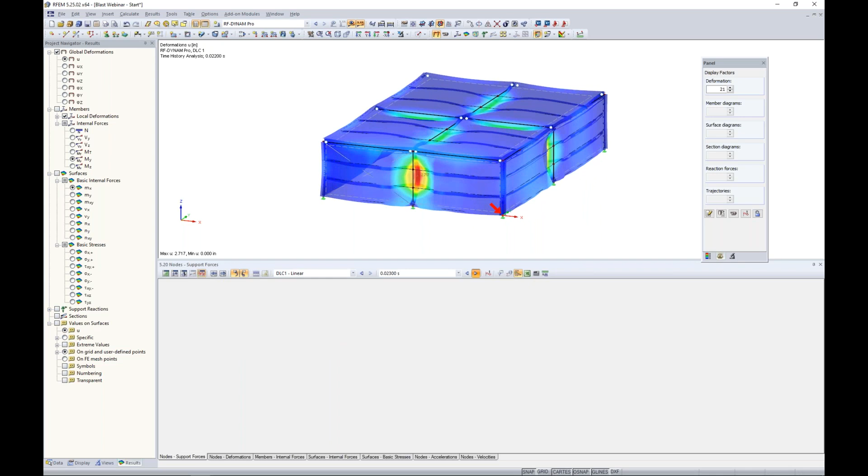And we continue scrolling through these different time steps to slowly see that wave load travel from the front of the structure to the center and the roof, and clear back to the rear of the structure.

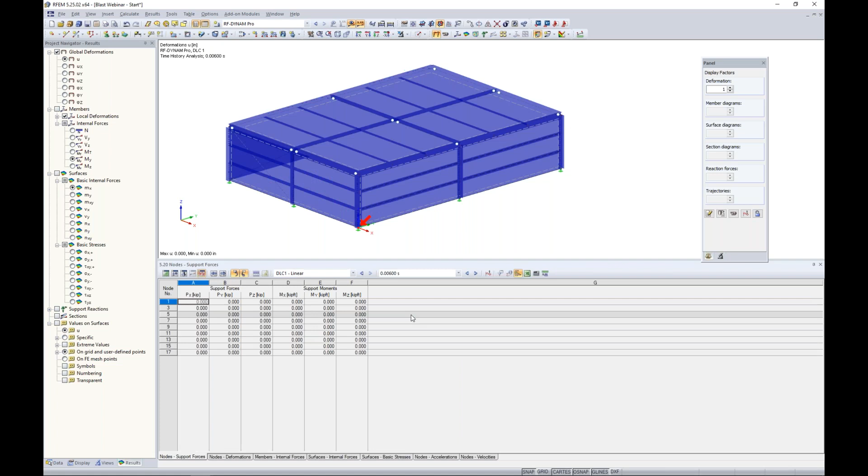Now, for any one of these time steps, you'll also notice that we have a dynamic envelope up here at the top. All of our results are going to be given to us in table format, so we'll see member internal forces, we can view node deformations, stresses on our surfaces. We can export all of this information to Microsoft Excel at the click of a button if we wanted to do some further sorting. We can view all of this information graphically here as well with our project navigator.

What I think is most of interest is a time course monitor, though, when we're talking about a time history analysis. With a time course monitor, we can go ahead and launch that directly from our table tools here, and I can graphically select a single node, for example. With this node, you'll notice the program automatically updates my time course monitor.

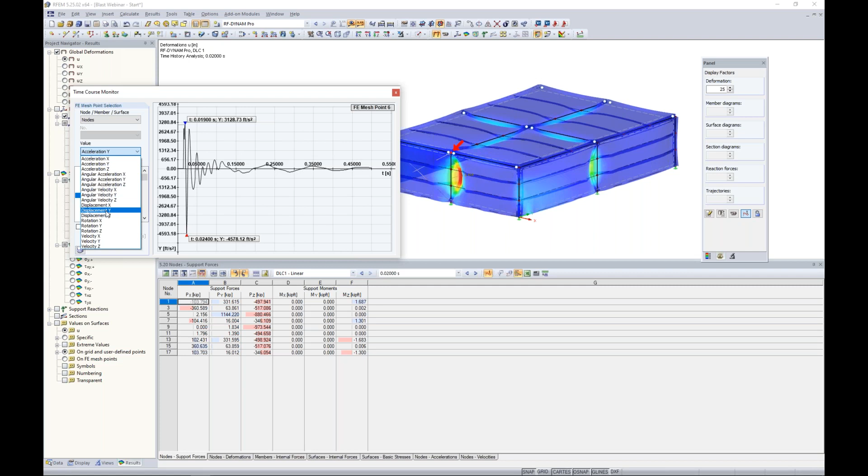Let's take a look at the acceleration in the Y direction. We can see here the acceleration at this particular node shown over the full duration of the 0.5 seconds for our time history analysis. And if we want, we can turn this to, let's say, displacements in the Y direction. So we're seeing these large displacements and they're slowly dissipating over time.

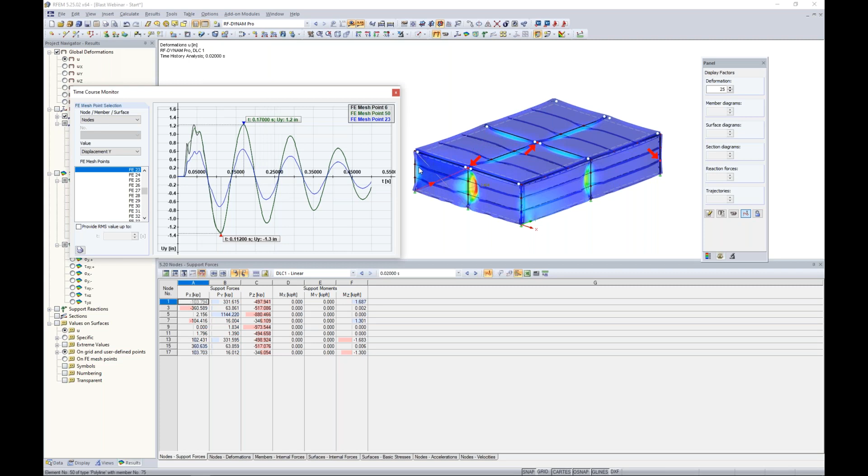We also have the ability to hold down our control key, and we can select multiple nodes if we'd like to generate them on this same time diagram. You'll notice that those will just be overlaid here. We can right click, view these as numeric values, and we can export this information to Microsoft Excel as well.

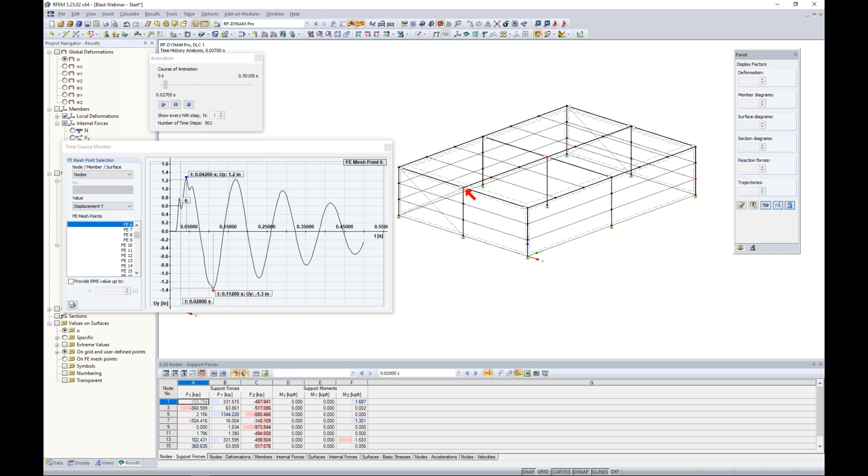It's pretty powerful what we can do within these various time course diagrams. Now, also within this option here is the ability to view animations. So if we take a look at our structure and turn on our animation mode, when we play this and turn on our global deformations, we're going to see the structure response of these deformations over time. We'll be able to see how these surfaces and members are moving. You can see that the time course monitor is slowly moving from time step to time step.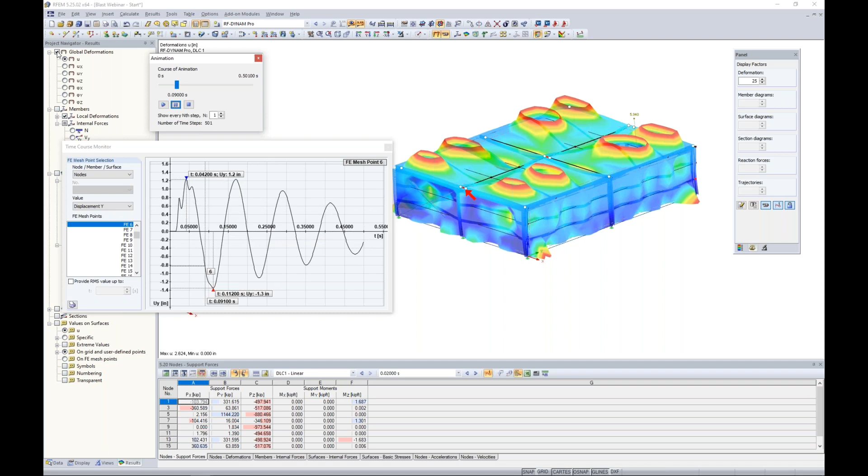Again, this information that is plotted here is important for those saved time steps to make sure that we get nice smooth curves here for our particular analysis.

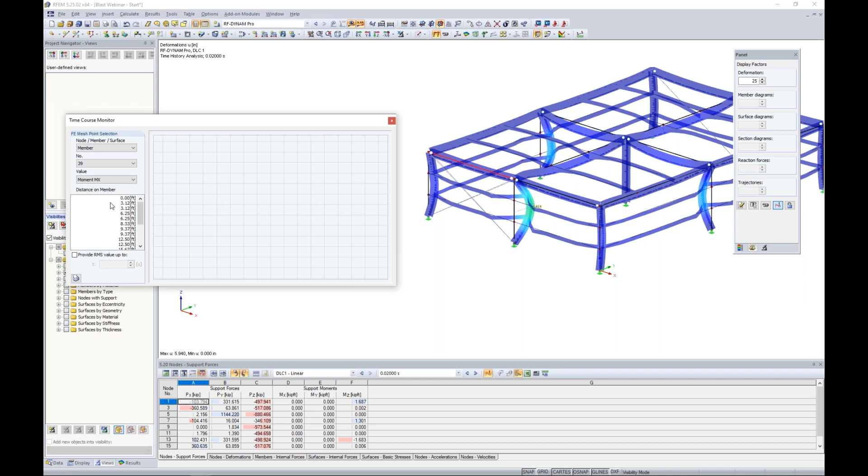The other thing that is of interest to us is some of the internal forces for our members. For this, let me turn off the display of our surfaces just so we can get a clear view of our member elements here. And we'll select this member, one of our front beams. We can take a look at our moment, for example, about the global x-axis. We can see we're definitely seeing higher moments early on with this blast impact analysis, and then it will slowly dissipate over time as well.

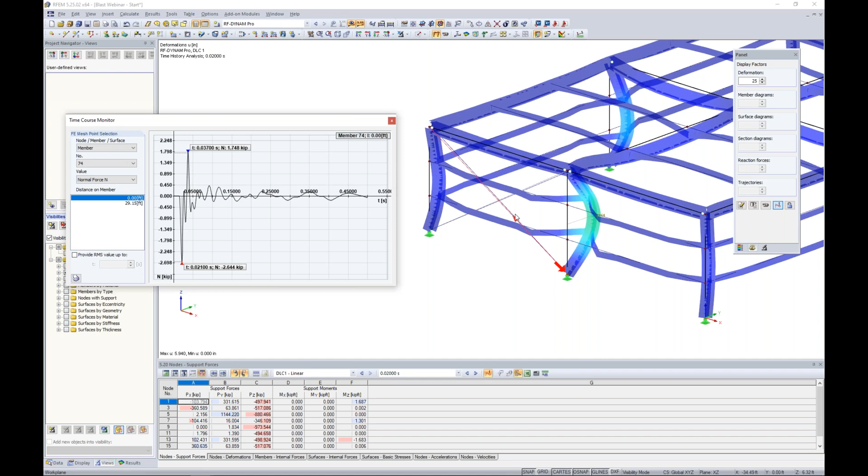If you remember, what else is of interest to us is this tension-only member. With the tension-only member, we technically should see only tension forces. So I'm taking a look at this within this time course monitor for my normal forces for member number 74, and we can see it highlighted here. But here's the problem. We're seeing compression forces of -2.64 kips, which is telling me that this cable element is taking on a compression load of 2,600 pounds. We certainly know that that cannot be the case.

So why is this? Well, this is simply a limitation of the linear solvers. Any nonlinear element, such as tension-only members, is going to be automatically converted into truss elements for the linear analysis. So the program only knows what it knows, and if it sees a truss element internally, it's going to think, okay, well, then it can take on these high compression loads as well.

There's nothing stopping it. Same thing with nonlinear supports. So if we have supports that are failing in uplift, sure, that's easy enough to define in RFEM for the static analysis, but this linear solver will convert it to a linear support when it runs the dynamic analysis. And finally, something like nonlinear materials - plastic materials for steel design will be converted back to linear elastic materials.

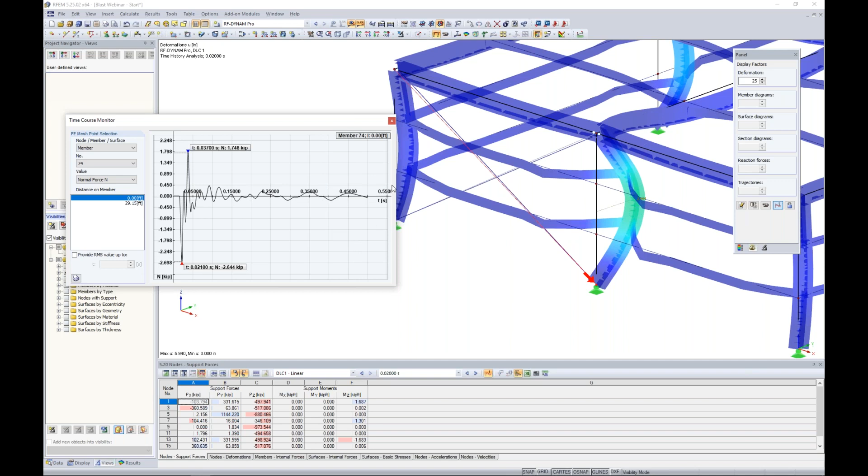So how can we overcome this if we know that these nonlinearities are extremely important for our blast design? This is where we're going to go back into the add-on module. We can go up here to the current module, RF-DYNAM Pro, and we're going to activate here Nonlinear Time History for time diagrams. You'll notice that none of my tabs changed here.

In fact, my time diagrams that I previously defined, we're going to use those again. Under the dynamic load cases, I'm only going to make a copy here of my linear load case, and we'll call this one nonlinear. What the nonlinear time history add-on module extension does is it releases these two nonlinear solvers.

So now we have the nonlinear implicit Newmark analysis as well as the explicit analysis solver. Now for something like a blast load, an impulse load, it is suggested to use this explicit analysis, and that's what we'll be using today.

Under the time history analysis, again, because we made a copy, nothing changes here. The only modification that we want to make is the time steps for calculation. Remember, I said that when you consider a nonlinear analysis, this requires a much, much smaller time step. That's just because we have these extremely rapid changes under such short durations that you have to have a very small time step to accurately account for this. So under the full precision here, we make this so small, in fact, that it will be 1 times 10 to the minus 6 power. So very, very small.

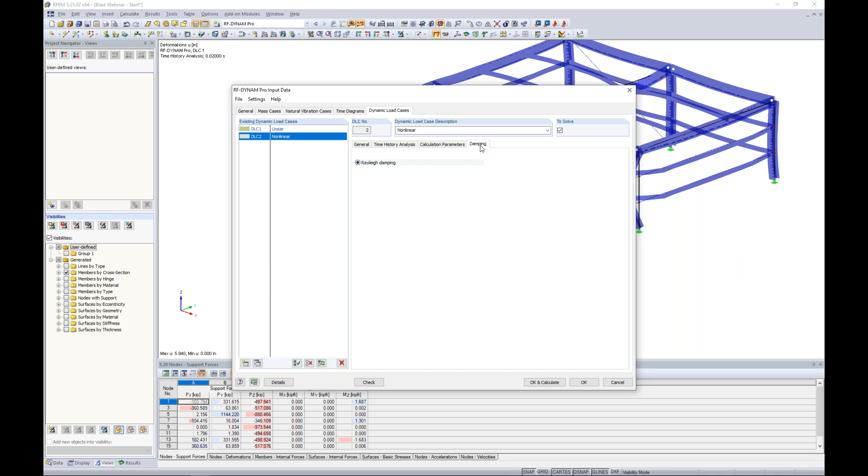Realistically, under calculation parameters, notice only the diagonal matrix is available for this particular explicit solver. And for damping considerations, we can leave this the same, but the program will only use the alpha coefficient for this particular solver. So as you can imagine, this is going to take a little bit longer to solve than what we saw with our linear analysis.

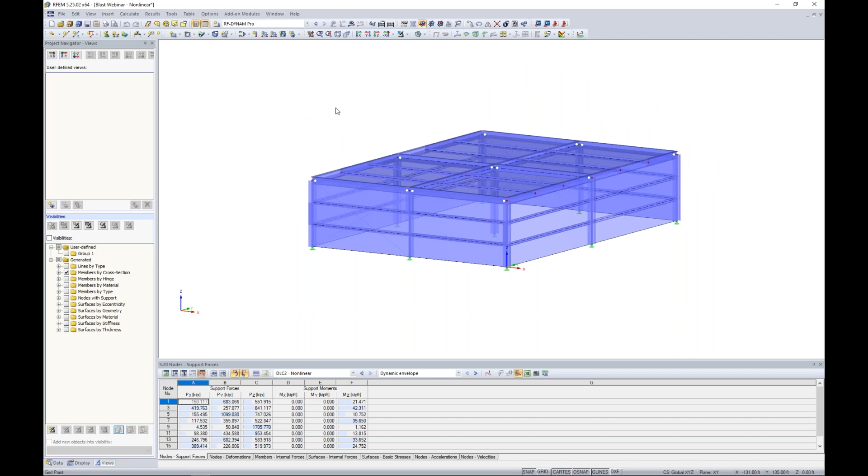So what I went ahead and did is run the results for us and open up a saved model. Once those results are done running, we'll be given back into RFEM. In my table 5, I now have my natural vibration case, my linear dynamic load case, but now I have my nonlinear dynamic load case available to me as well.

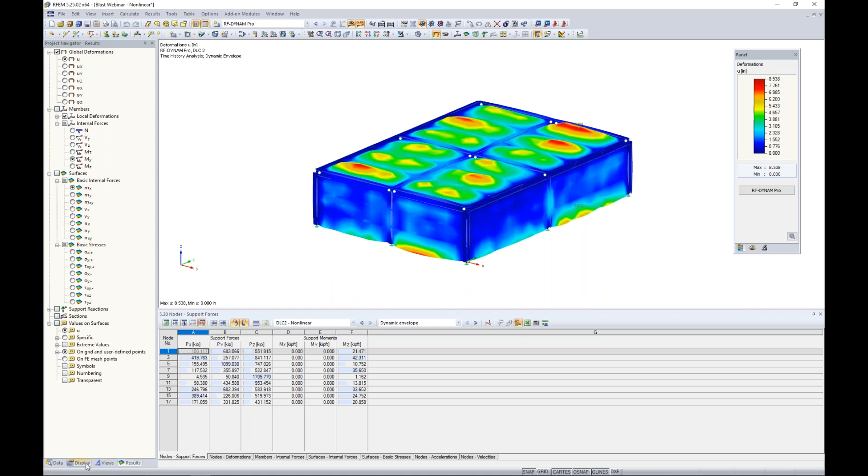Now, we don't need to cover all of the various ways to view the results. It's identical to what we just saw with our linear analysis. But what might be interesting to us is if we go ahead under the Views tab and turn off our surfaces here, and let's focus in on that tension-only member.

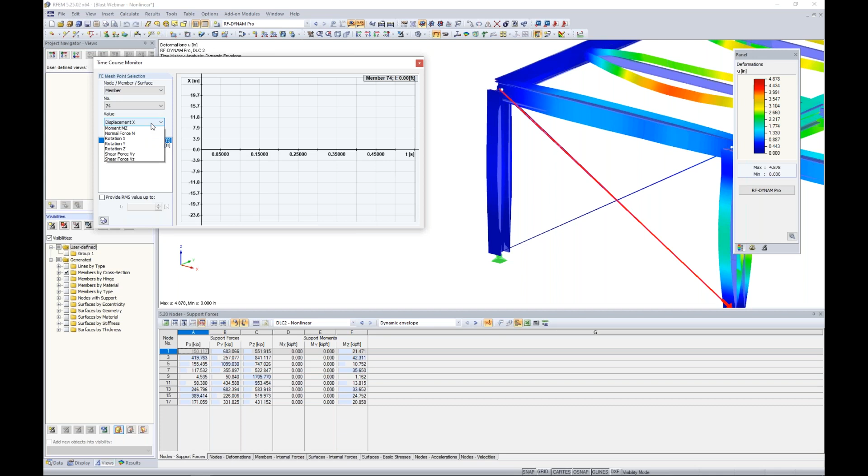So I'm going to launch my time course monitor. I'm going to select that particular member that we saw before. It doesn't matter whether we choose 0 or 29.15, the start or end of the member, but I do want to view the normal forces. And now you can see how drastically different this looks.

This member is only taking on tension forces. The minute that it sees any type of compression, it's taken out of the analysis, but when tension is reintroduced into the member, it is activated again. So we're only seeing those positive forces here.

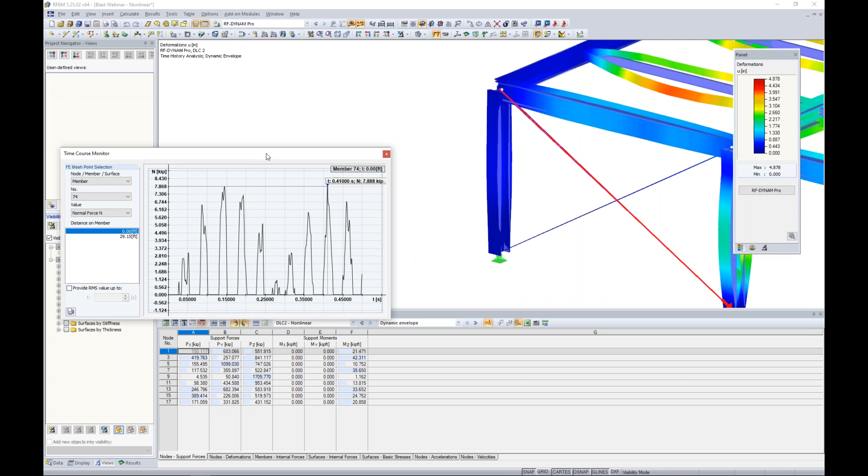We also have the ability, if we take a look at our results tab here, to activate the animation. I thought this might be interesting for you guys to see, that when I go ahead and run the global deformations here for the structure, you can actually see the element—let me also turn this into wireframe view. These two elements are deactivated and activated, so you can see them graphically turn on and off as we move through the total duration of this time history analysis.

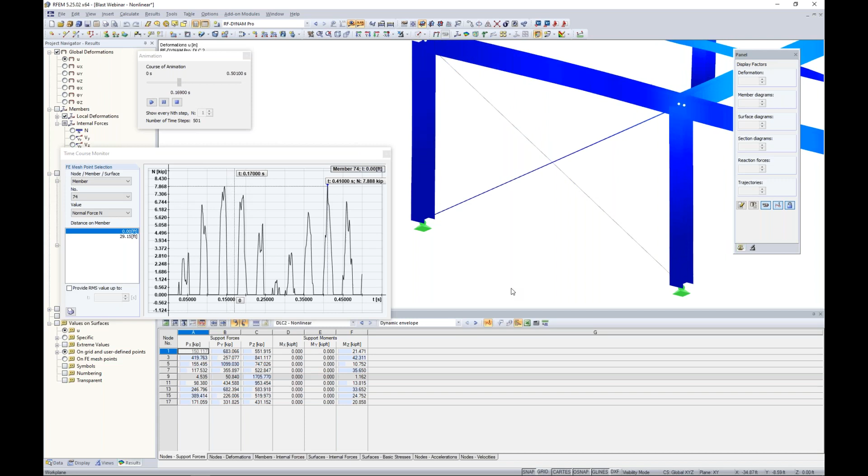So certainly a big advantage here if we have those nonlinearities that we want to account for with this blast analysis or any type of nonlinear time history, we would want to utilize these nonlinear solvers.

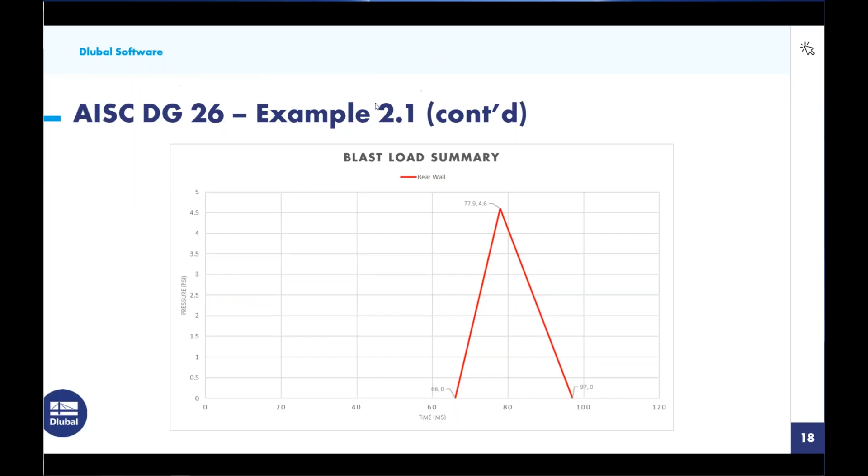All right, so that will bring us to the end of our presentation today. As always, I know that was quite a bit of information.